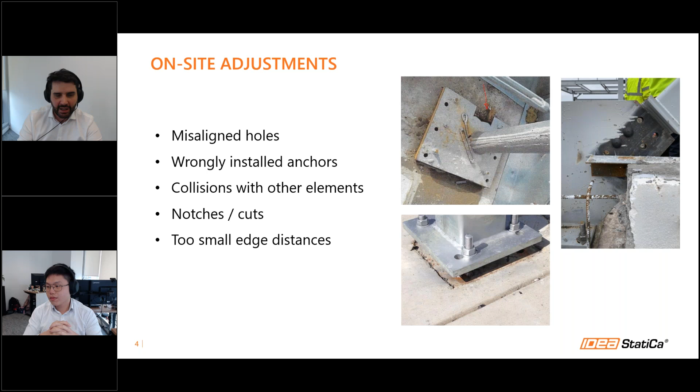And what are the issues if we need to resolve this? From my experience, typically if someone writes me an email like, hey, we need your help to resolve this situation, or they give me a call, I'm in the middle of something different. I've already finished the project, and now I have a new deadline. Now, out of nothing, I need to deal with a new issue. So I'm under time pressure. Also, I typically cannot use my software. If I used my Excel spreadsheet, probably I cannot do those adjustments to check the new situation.

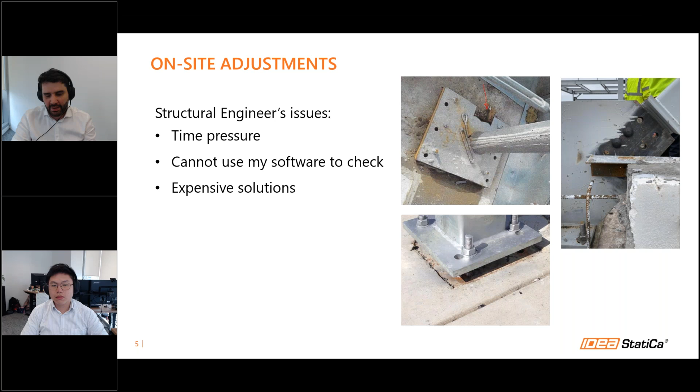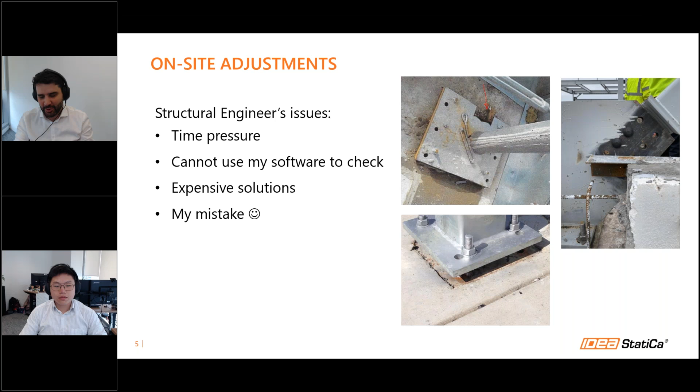Also, there are some solutions that can be quite expensive. I could propose, okay, I don't care, you need to fabricate a new piece, but it can be really expensive. It can cause big delays on site, and we are partners with site, so we want to find the best solution for them as well. And also what can happen, and it also happened, sometimes it could be my mistake. I have something wrongly specified or submitted a wrong drawing. So I need to find the best solution because then I can save myself.

Before proceeding to showing you those examples and how they can be easily resolved, I would like to ask you in our poll, how often do you need to deal with on-site changes? Let me please run the poll, and please answer if this situation is happening to you very often, just sometimes, or rarely. I just see some results. I would ask the remaining attendees to vote. About 50% have voted. Okay. I will give you 5 more seconds. Okay, let me close the poll and let's see the results.

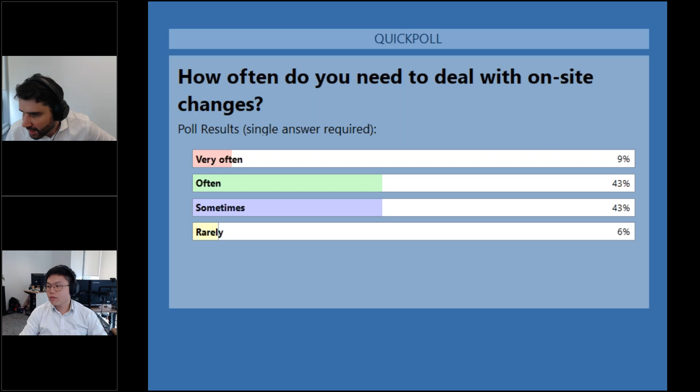I would say the vast majority is facing this situation often or sometimes. So it seems that it's good to have a tool to resolve them quickly and efficiently. Thank you very much for this. I will hide the results, and now I will pass the presentation to Stefano, and he will show you how you can deal with this situation easily. So Steph, it's yours now.

Okay, thank you, Jan. Let me try sharing my screen. Right. Okay, give me 1 second.

Okay, thank you. I prepared some case studies today for us to look into and see if IDEA StatiCa can really help you in those cases that you find during your work.

Okay, so the first case that I prepared today is this type of a connection to baseplate with some diagonal members. So let's say you have designed this nicely, you have submitted it, and now the plate is already manufactured. Everything is ready to be installed on site. But then you might see that on site there are some unplanned interferences preventing your bolt installation. For example, something like this is a real photo from a project. You will see that there are only 5 bolts that can be installed in your connection.

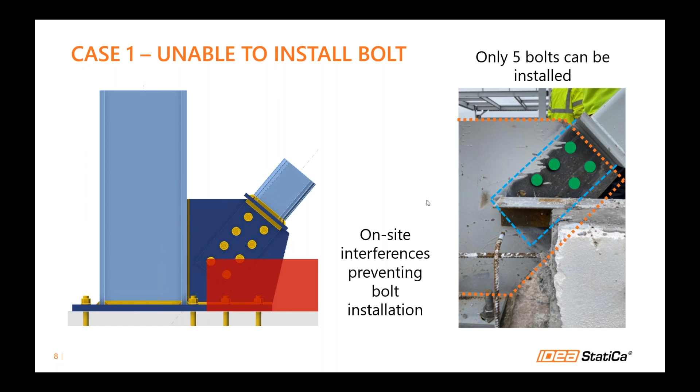Now, what can you do? You can change your design, maybe go to your Excel, but how do you consider the bolt openings that are already manufactured inside your plate? Then how do you consider the non-symmetry of the bolt arrangement that you see here? It might be a headache for you, but if you're using our software, you don't need to worry about it. I'm just going to open up IDEA StatiCa.

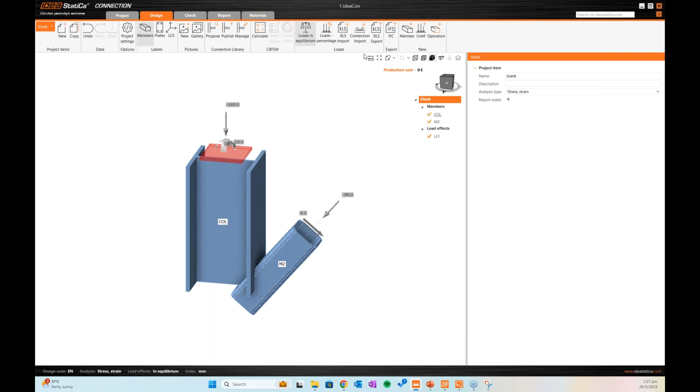Okay, so for this case, for example, this design has been done quite a few years ago, then you don't have the original connection file, or maybe you were using Excel or something before that. No worries, I'll just start from a blank. So firstly, you must model in your geometry with the right cross sections. Then you put in your forces. After that, you put in your original geometry first by using this operation tab here, top.

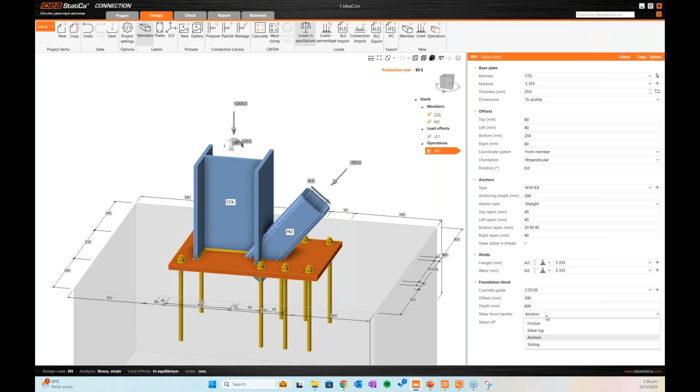Then firstly, I'm going to model in the base plate. Then I'm going to adjust the geometry to profile, and then you change the anchoring length based on what you have designed previously, and also the position of the actual anchors itself. And 40. Then change the offset, change this one to friction. Okay, now I've taken care of my base plate.

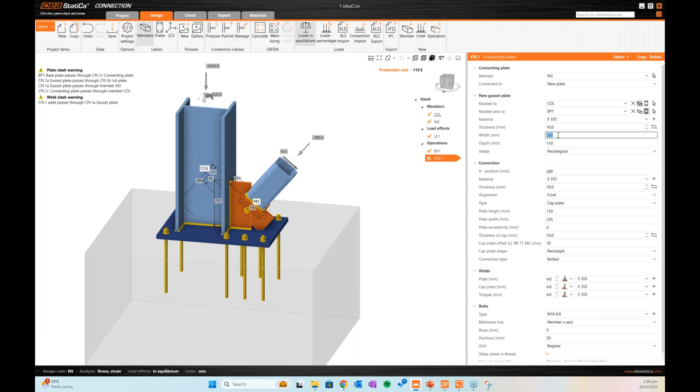Now I want to model in the connection of my diagonal members using this so-called connecting plate. So first you change the member that you want to connect. Then you want to relate it also to the base plate, because this connecting plate is related to both this member and the base plate, column and the base plate. Then you also need to change the geometry based on what you have manufactured. Change the capping plate, the geometry of the capping plate and the thickness of it. Same with the bolt, you can change it as per what you have constructed on site.

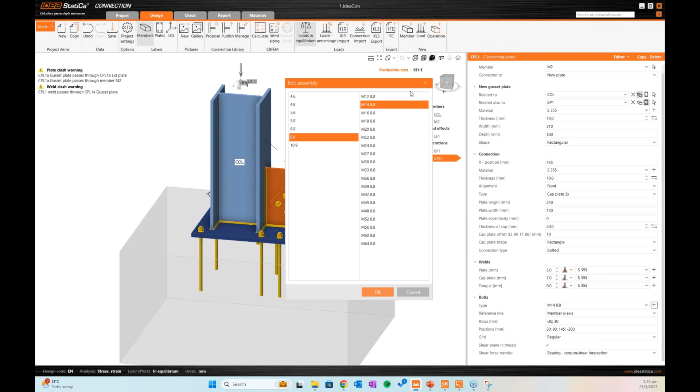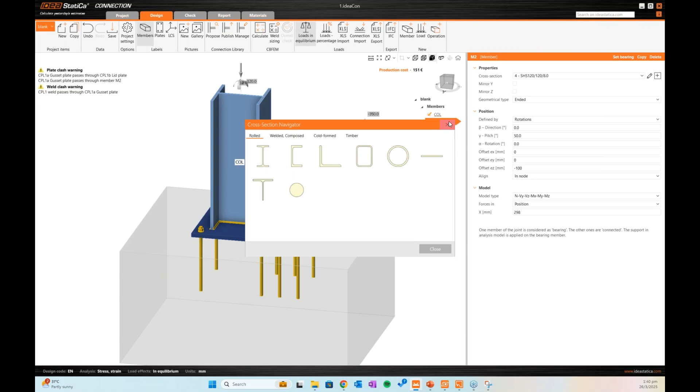Say, then yeah, for this one, yep. Okay, so basically you can just model in what you already have on site. You can also change the bolt material, bolt geometry, bolt diameter based on what you have on site. You can also create your own import, change your own section based on what you have on site. You can even modify or customize your shape based on what you have on site. So it's very flexible. And even in the material tab, if you are not using the standard materials, you can also customize this very freely.

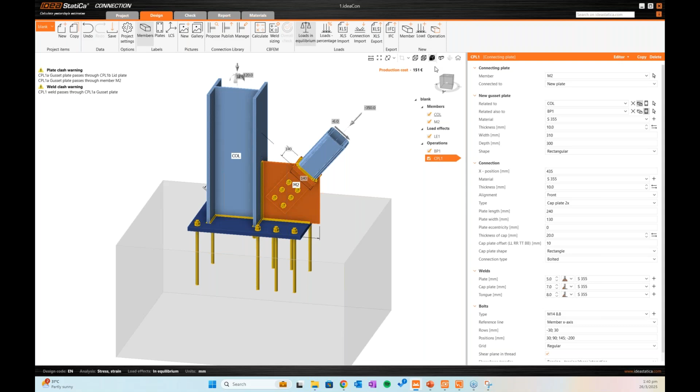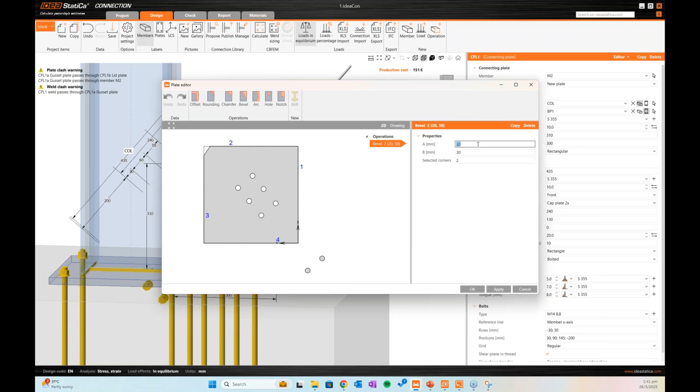Okay, so I have finished, but as you can see here, there are some warnings here. No worries, we can just go to transparent view, and then we can find where the problem is. So you can see here that my plate is going through my diagonal profile here. So what I'm going to do is put some cuts here by going to editor, going to gusset. I want to add some bevels. Change the sizes, adjust the corner accordingly. And then I add another bevel. You just need to click apply.

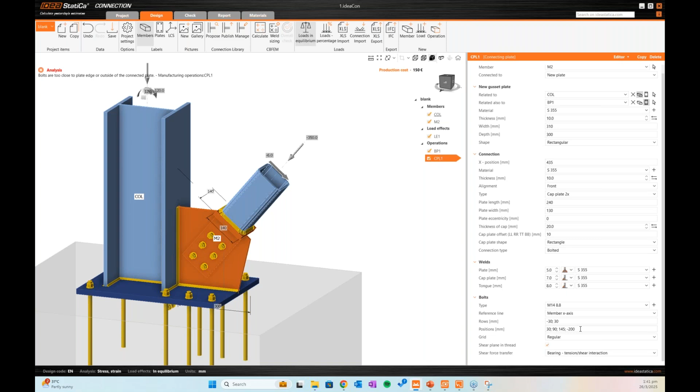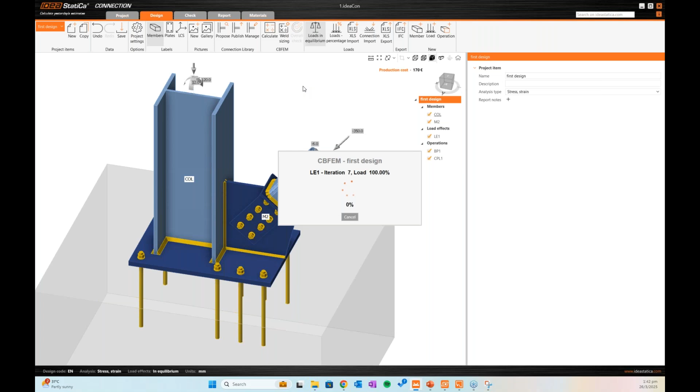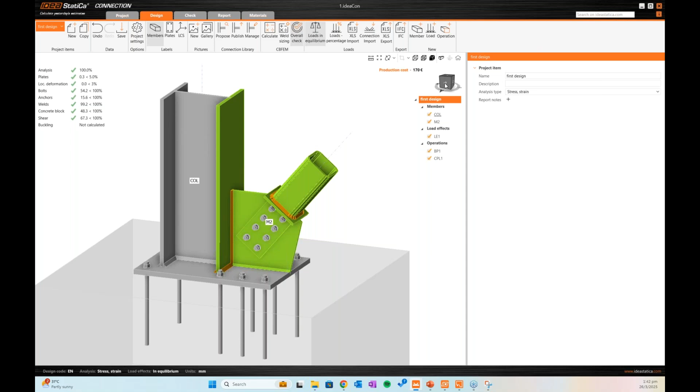Okay, now good. So you can confirm that your original or first design is working correctly. Now you want to adjust it to what you actually have on site. As I mentioned just now, we can only construct these 5 bolts. We cannot install these 3 bolts. So what you need to do is remove those bolts by going to this plate editor here. We go to editor, we go to tongue, and then we just explode the bolts. Then we want to remove 1, 5, and 6. That's it. Now you click OK.

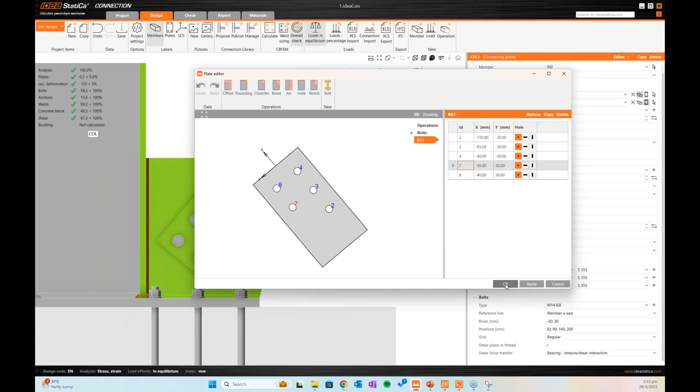You can see the bolts are now gone for the ones that you cannot install, but then you still need to put in the holes to mimic the actual geometry on site. So you go to editor again, go to tongue, then you just need to add holes for those bolts that you have just removed. Right. Then the diameter should be 2 millimeters plus your bolt diameter, which is 14. And you just need to copy it, then put it for the bolts that you have just removed. So that's it. Just click apply.

You can see there's a hole now in our tongue plate, but there's no hole yet in this connecting plate here. You just need to go to editor again, then click the gusset plate. Then we need to add the same holes here.

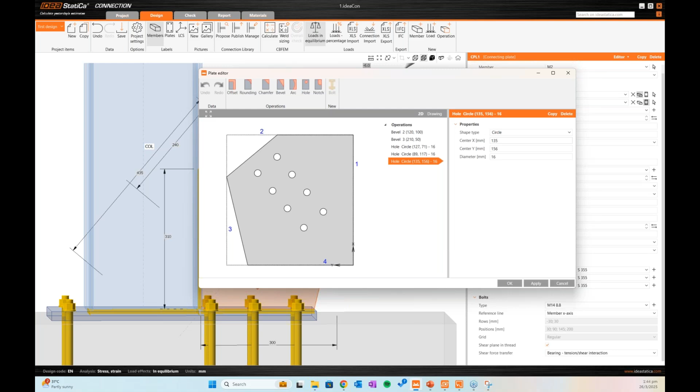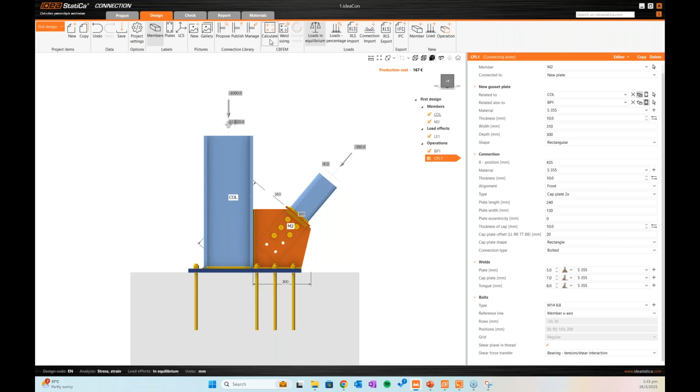Okay, once you are satisfied with the position, just click apply, and then you can check whether your model has the correct hole position or not. And you can see now that it already has the correct hole position, and that the geometry is now matching what we have on site. So now we don't need to worry whether it can work or not. We just need to click calculate and check whether your connection is really working with the given load or not.

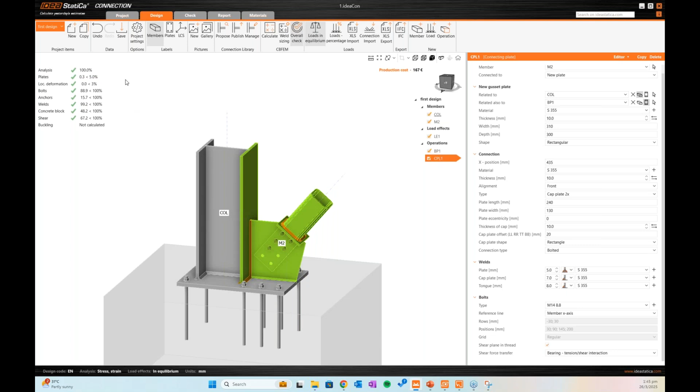Right, so you finish running, you can see here that we have all ticks here, meaning that our current on-site design is working. So yeah, you can remove just these 3 bolts and leave the hole there, and now your connection is still working as intended. If you want to see more detail, you can go to the check tab here.

You can see all the bolt forces, the anchor stresses, the weld stresses, then the concrete block stresses, all that. Yep, you can check all this very detailed report here, and of course you can also check the equivalent stresses of your plate. Once you are satisfied with everything, you can go to report.

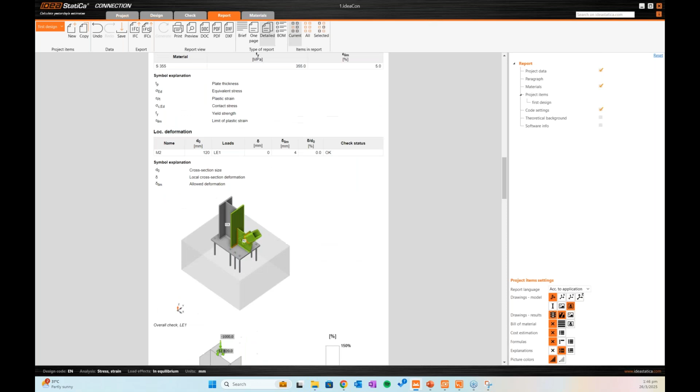Then you just need to click generate report. And that's it. You can use this to justify whether your on-site connection can work or not. Then you can submit this and then go on with your day. So that's the first example. Now let's see the second case study.

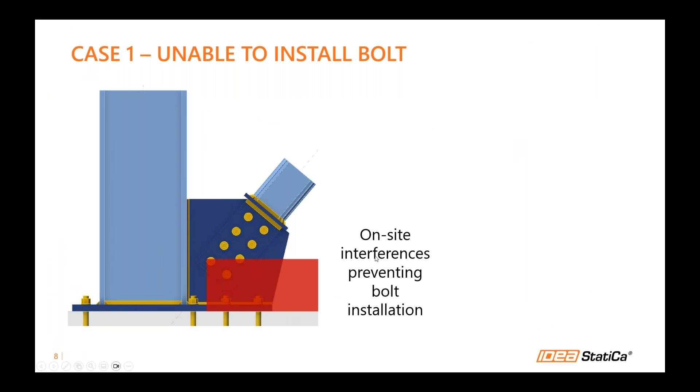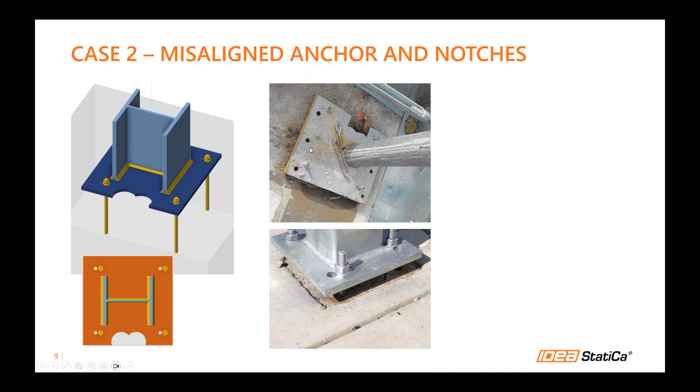Right. So the second one, let's say you have designed your base plate, put in your bolt, checked your bolt and everything, but then when it comes to site, when they're trying to install it, the anchor is actually misaligned. So you have manufactured your plate, you have installed the anchor to your concrete, then you have cast your concrete, and then when it comes to installing the plate, it's actually misaligned with your bolt hole.

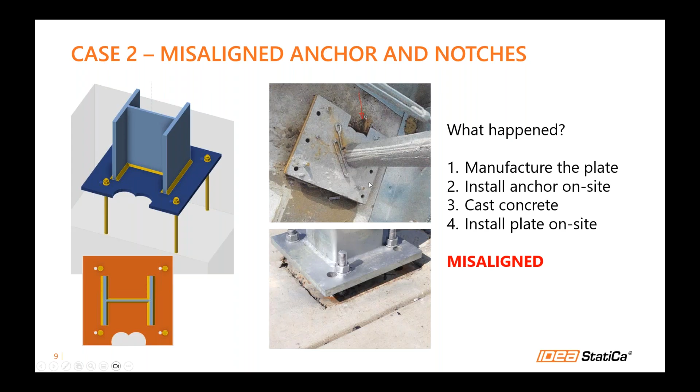Then there are also some cases where maybe we have some manufacturing defects here. As you can see here, there are some holes in the plate that were not planned. But same as before, you don't need to worry if you are using our software. You just need to open our software and model all these holes and all these openings as per what you have on site, and check whether the connection still can work or not. So I'm going to do that now. Going to the second case.

Okay, for this one, let's say you are using IDEA StatiCa, you still have the original connection model. So what you need to do now, you just need to modify this model. Okay, the first thing that I'm going to do is I'm going to move the bolt and then add the misaligned holes. What you do, you can go to editor, and you can move the bolt to the current location.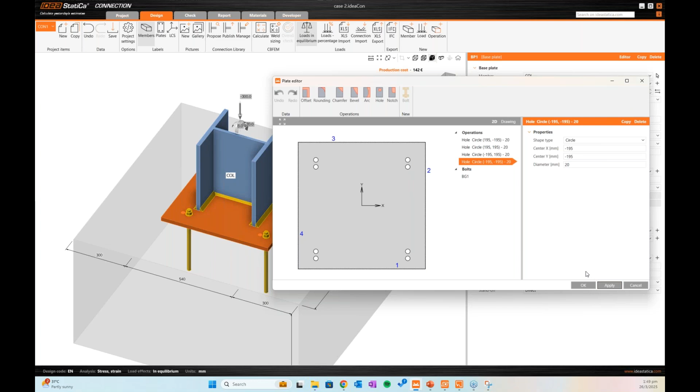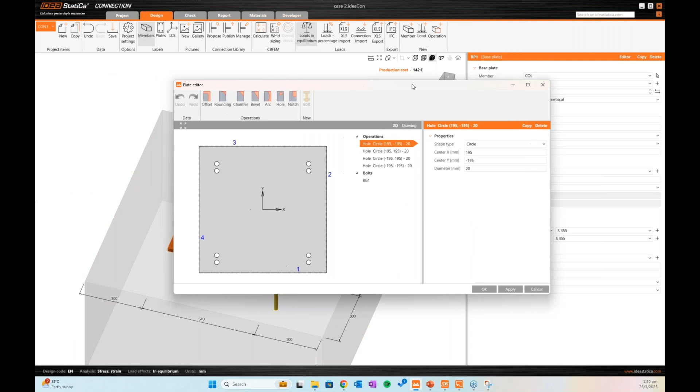Okay, so as you can see here, we have successfully modeled the misaligned base plate, and we can also model the hole very easily. Then one thing left, I want to model the manufacturing defect holes that we can see here. For that, you can use the same thing by going to editor here, and I just put another circle hole with adjusted position and adjusted diameter. That's it. So click apply. Now you can see that even the manufacturing defect you can easily model inside IDEA StatiCa.

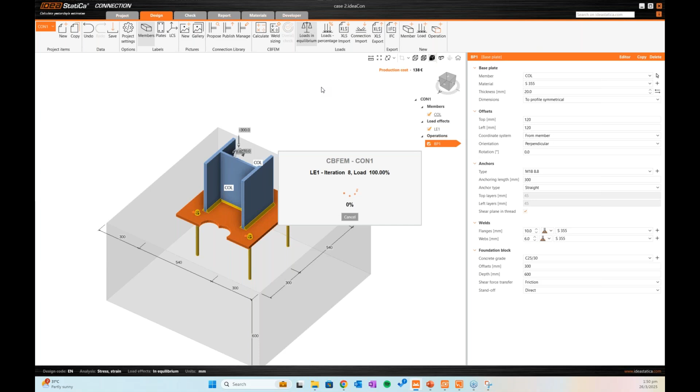After that, you just need to calculate and confirm that your current connection is still working. You go to the check tab here. You can check the stresses of your plates. Yeah. And you can see the stresses inside the concrete, how the manufacturing defects and how the misaligned bolt affect your concrete stresses and all that. You can also show the deformed shape if you would like to, so that you can confirm that everything is still okay.

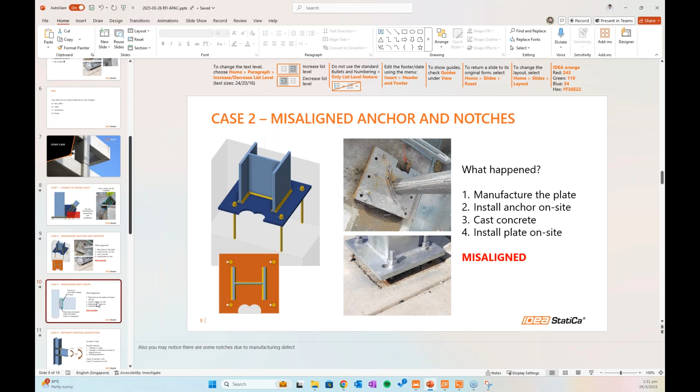Right, so that's my second case study. Now let's jump on to our case number 3. So for this one, you have already designed your connection, same as previously.

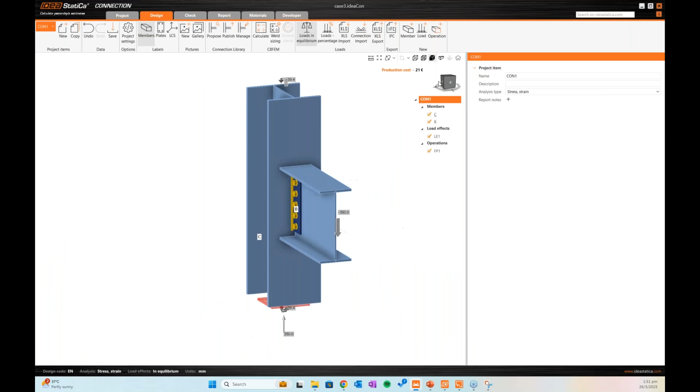Right, so I'm going to go to the software IDEA StatiCa here. So for this case, I have a pre-prepared model. Let's say this is your original design intent. We just run it first and check everything is working. Right, so everything is working correctly for the original model. But then, what do we do if we have something like this? We have a misaligned hole like this.

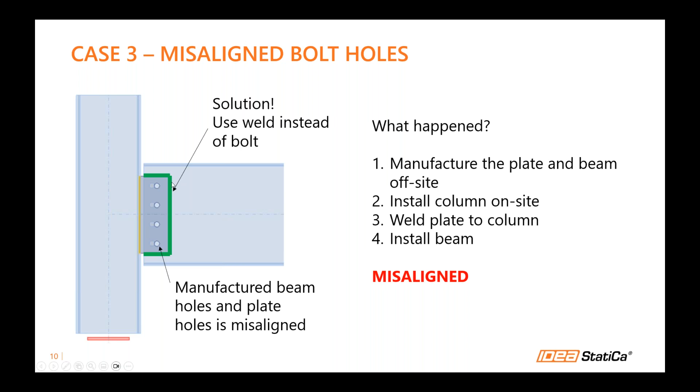The solution will be just to not use the bolt anymore, but we can just use a weld all around this fin plate instead. So to check the new solution, you can easily do it using IDEA StatiCa. Firstly, you want to remove the bolt first by going to editor and then explode and delete all the bolts here.

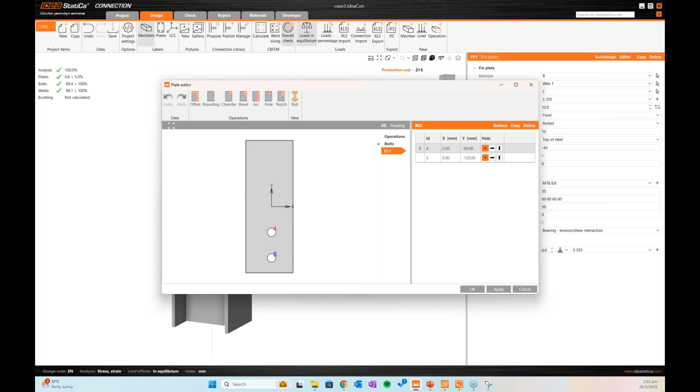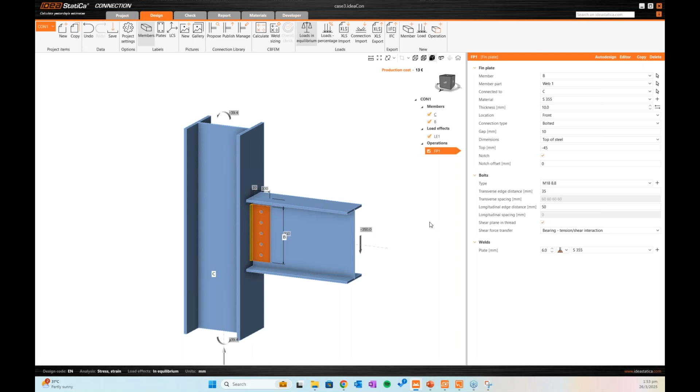Now we just need to put a hole to our beam web. Now to do that, you can use our opening operation. You just put it in and then you select the web, the beam. And then you change the diameter according to our bolt size. And of course, you need to change the position accordingly. Right. X position is not correct.

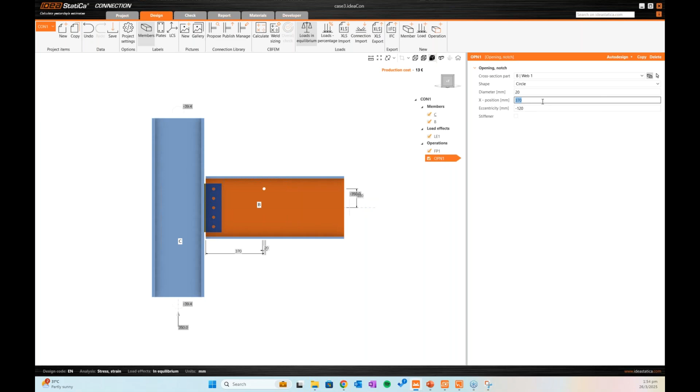Right. So as you can see, you can use this opening operation to actually simulate the bolt opening that you have manufactured to the web of the beam. Then I just need to copy this and change the eccentricity here, which is the location. Right. Oops, what is this? The intersection. Oh, okay. Minus 120, minus 60, 0. Let me check. This one is causing a problem.

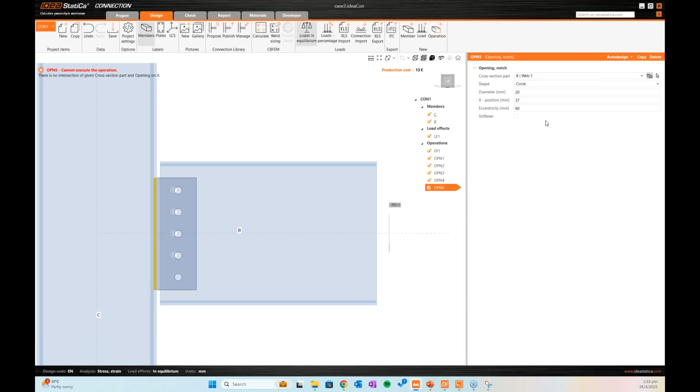Copy. Minus 60. Okay, sorry. So we have minus 60 on top. So now it's 60 and 120 on the bottom. Right. So once you are satisfied with the bolt hole and you think it already matches what you have on site, now it's just left to put the weld around the fin plate and connect the fin plate with the beam web.

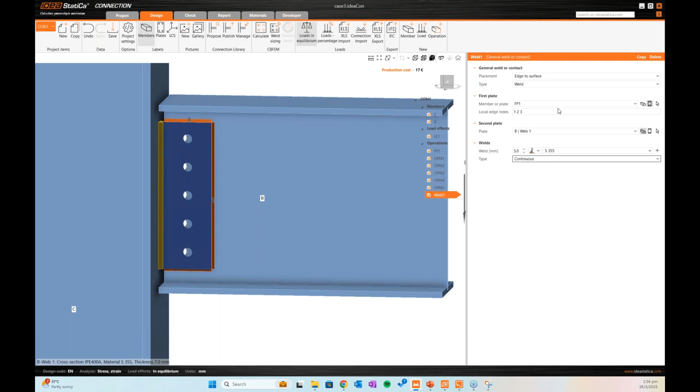We're going to go to operation and add a weld operation here. Then we need to change the second plate to beam web. Right. Then you can see here some small numbers, 1, 2, 3. 1, 2, 3 are actually the edges that you want to weld between these two plates. So I'm going to make this a C-shaped weld here, so I'm going to use index 1, 2, and 3. Then I just need to change the weld thickness as per what is required.

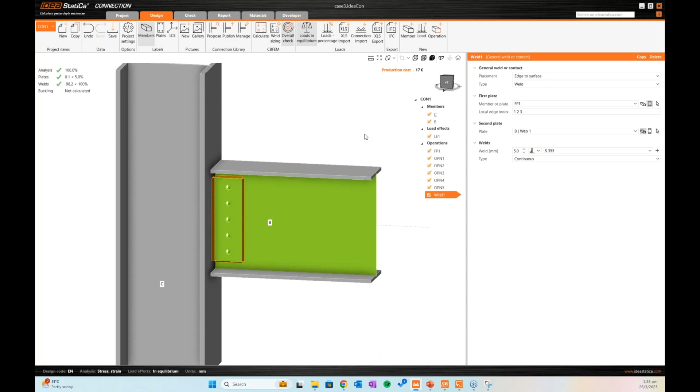So that's it. We just need to click calculate. And you can see in just about 2 minutes, I can actually confirm whether my design can work or not. So you can see it's very easy to play around with your design, iterate all solutions that you have in mind and see which one works best for your connection. So we have solved our case number 3. Now let's move on to case number 4.

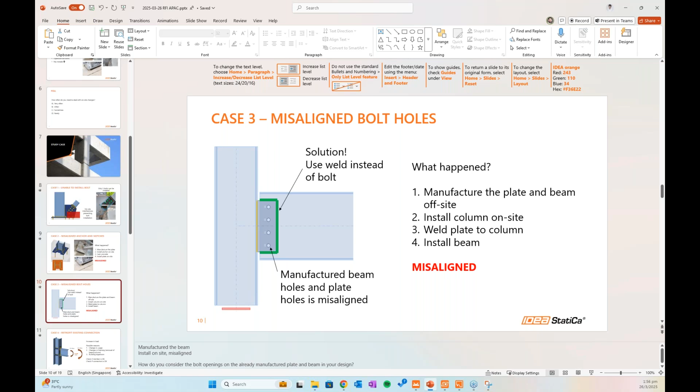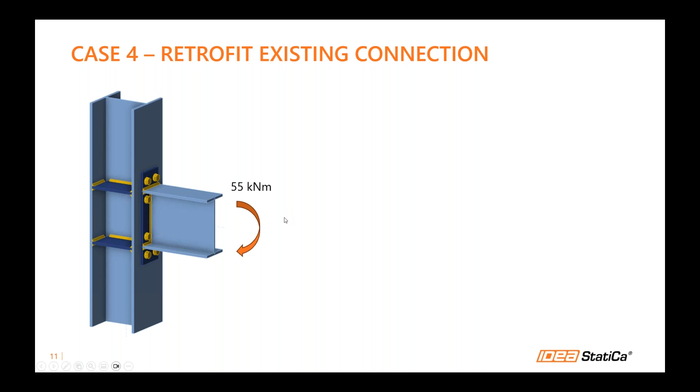Okay, so for this case, let's say there's a building that was designed in the past, maybe 10 years ago or so. Then the owner of the building wants to change the usage of the building. By changing the usage of the building, there'll be an increase in forces to our connection design here. So there are multiple reasons that the increase in load might happen.

As I mentioned, maybe change in usage, change in framing, maybe removal of some columns and beams, which of course will increase the load to your connection here, and maybe some building expansion. So what do you need to do after this? You need to modify your global FEM, and then check whether your member is still okay in your global FEM. Once you confirm that your member is okay, you need to confirm whether your existing connection can work with this increase in load.

Right. So I'm going to open my IDEA StatiCa here. For this one, because most probably someone else did the design a long time ago, you would not have the connection model. So I'm just going to start from a blank model. I'm going to show you the templates that we have inside our software here by clicking this propose button.

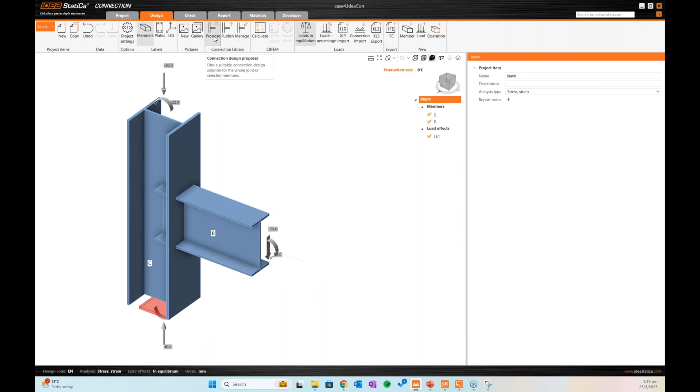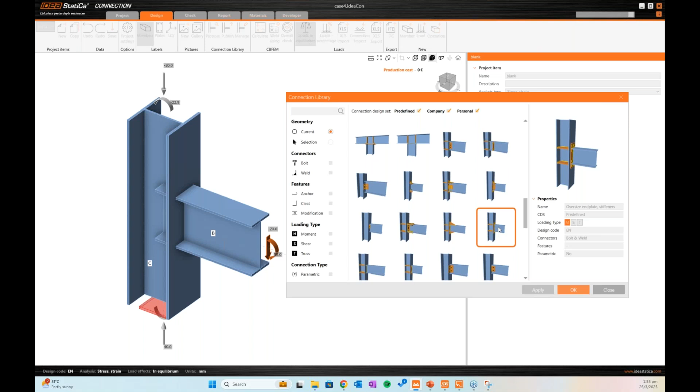Right, so what does our template do? Actually, it will detect the geometry of your connection, and then it will suggest all the connections that are appropriate for the geometry that you have modeled. Right, so I'm just going to see whether our on-site connection has something similar here that I can use. Okay, maybe this oversized end plate is good enough and can match what we have on-site. So you just click OK here.

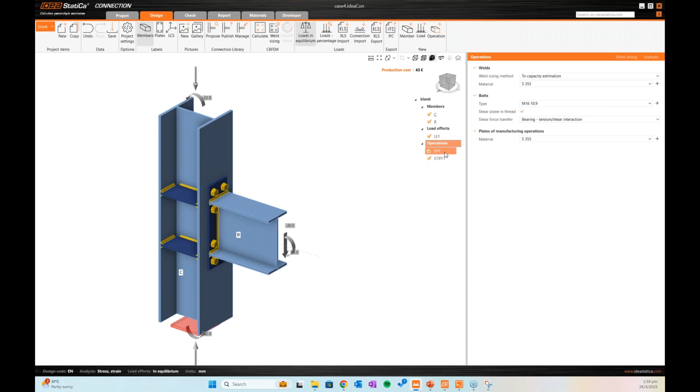You can change the steel grade and bolt grade accordingly, but I'm not going to do that. Just going to click OK, and you can see with those 2 clicks, you can actually model the whole connection easily using our templates. But then I still need to adjust a little bit according to what I have on site. Right, just change the bolt grade, and I change the size of the weld.

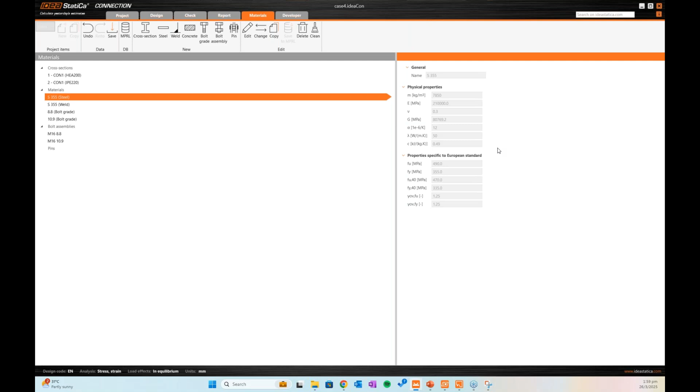As I mentioned, because it was designed maybe a long time ago, maybe you don't have your bolt grade here, you can actually customize it very easily here. Same goes for your steel members. Maybe you are using some material which is not used anymore. You can just go here and customize your material freely.

Right, once you finish, then we have our original load here before the changes in, let's say, building usage. So this is our original load. I'm just going to run it and see whether everything is working correctly or not. So as you can see, you have confirmed that the current design can work for the current load. Now we want to check whether with the new load, our connection still can work or not.

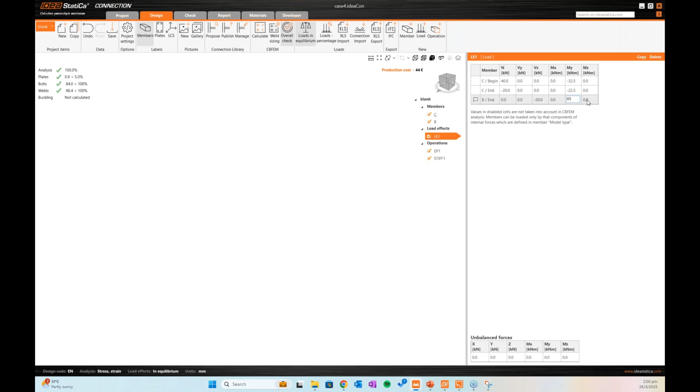So I'm going to increase the bending moment from 55 to 65 and add some more shear, minus 20 to minus 30. Then I need to change all these so-called reaction loads so that I can get the balanced force in my node. This one, 60 and here minus 30. As you can see now, my node is balanced. You can confirm it by looking at this unbalanced force table, and everything now is 0.

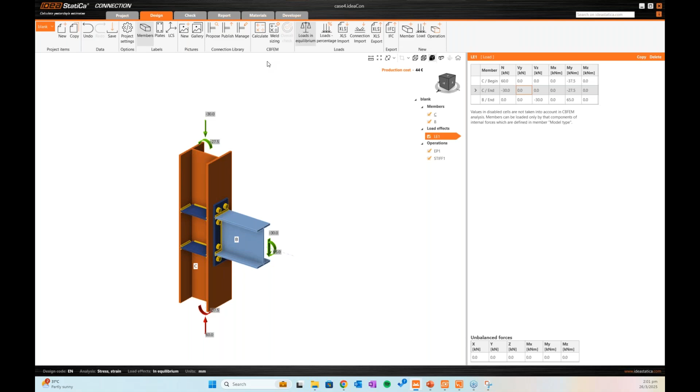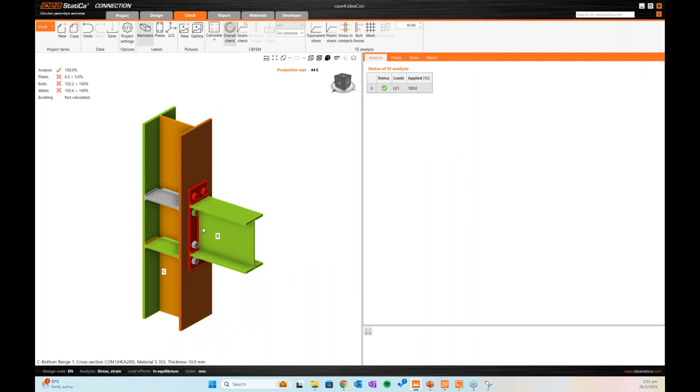Right, I'm not going to change my design now. I'm just going to check whether what I have on site now can work with the increase in load or not. Okay, now you can see that actually this plate is not working. You can go to the check tab, and so this plate and these bolts are not working. Go to the check tab. So what I like to do, I like to turn on this plastic strain and see the deformed shape.

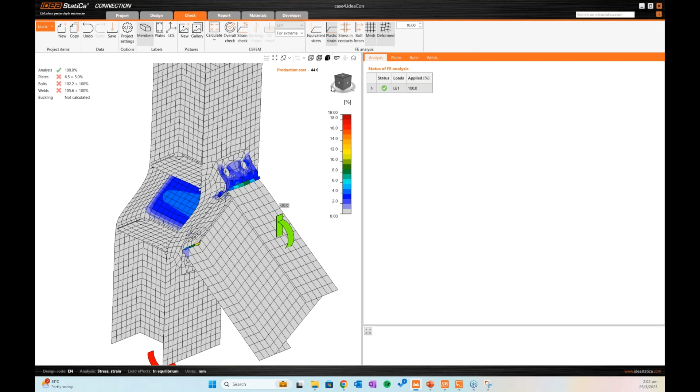You can see that this plate is working hard, but this panel zone is also working hard, if you see here. So we're going to think what we need to do here. I'm seeing some panel zone working hard here. So maybe for the first iteration, I just strengthen the panel zone here.

So what I'm going to do, I'm going to use operation, use this stiffening plate, and I'm going to change the position to member, change it to C, and web 1, change the type to doubler, and the location to both. So both indicates that it's in front and back. I'm going to change the thickness and the geometry of my doubler plate. Right, so I'm thinking, okay, maybe this one can work to strengthen our panel zone. Just click calculate again.

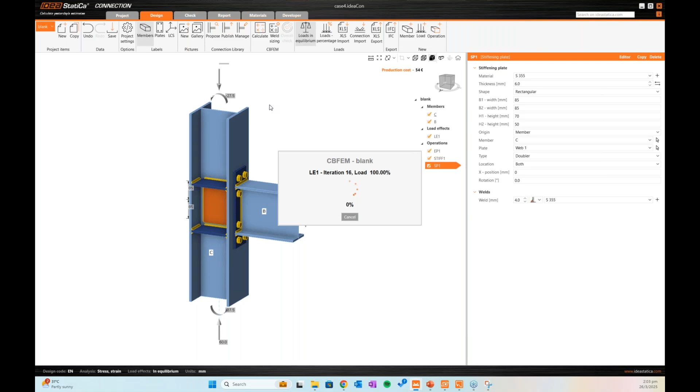Oops, okay, so the panel zone now works, and this plate also works, but then there's still a failure in this beam. Okay, then what do I need to do next? I'm thinking to add some kind of seated connection, a seated plate here, to actually strengthen this connection. I'm going to use operation again. Now I'm just going to put a rib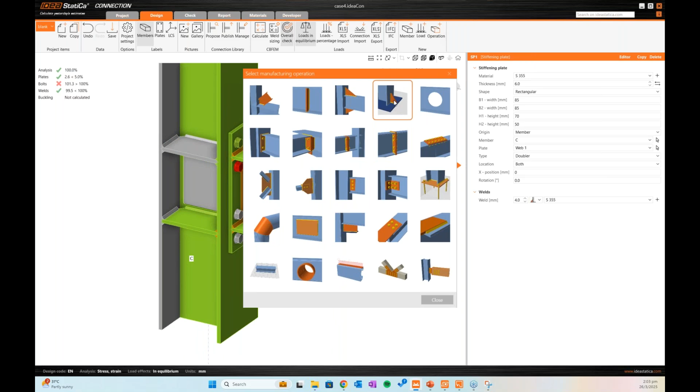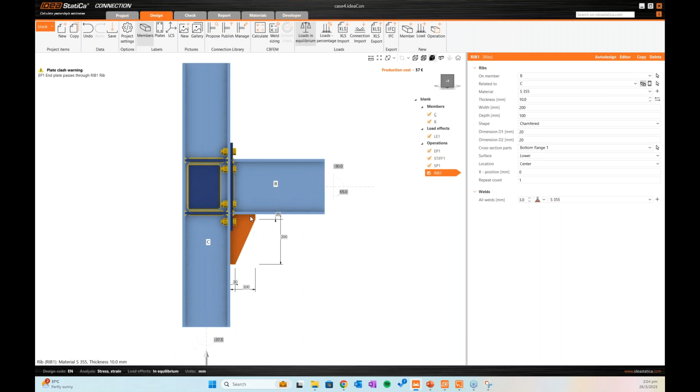connection and change the thickness, geometry, change the shape to chamfered, and change the position to bottom flange. Surface lower, the position is center. So I want to add some seated connection like that. Seated plate. But then you can see here that there's some plate clash warning.

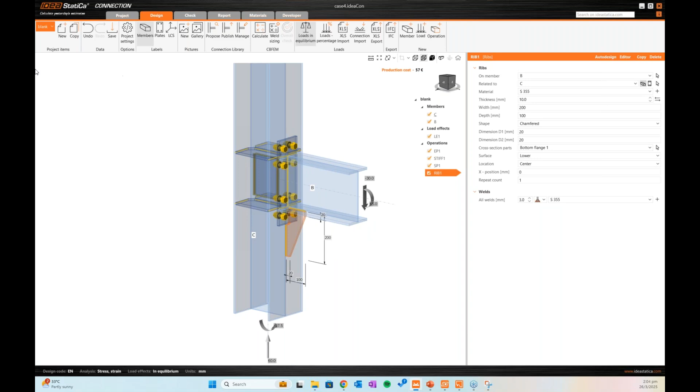Same as before, when you see a clash warning, you just need to go to a transparent view. You see a red color. Red color indicates where your clashes are. Right, so I need to add some kind of plate cut here. You can do that by going to editor, and I will add some notches. Selected corner number 5 and change the geometry. Apply. And you can see now that the plate clash warning is gone. And let's just quickly calculate.

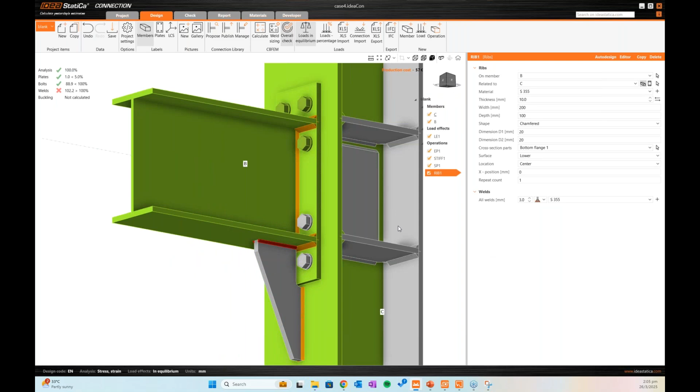Right, as you can see here, there's still a bit of failure here. I'm going to click this one, change the value to, let's say, 5, make it a little bit bigger. Let's click calculate again. Right, now as you can see here, there are 4 ticks, which means your connection is working. So it's now all good.

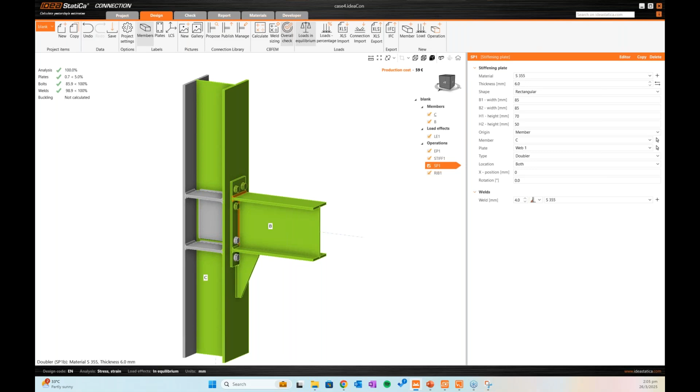But then I see the panel zone seems like it's not working, because you see the traffic light here. The traffic light colors here indicate that gray is not so much used, or underutilized, whereas green is optimal. So I'm thinking maybe this panel zone is not really needed once you added this seated plate here. So I'm just going to turn this operation off and remove the double plate on the panel zone of the column. Then I just click calculate again.

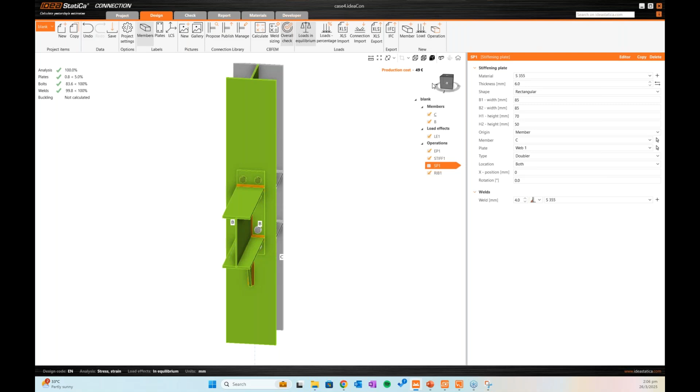Right, now you can see that it can even work well without the double plate. So yeah, I'm satisfied with my final design. I was able to try out several different solutions quite easily here, iterate through them, let's say double plate and then the seated plate. Then I can find the most optimum solution for my connection here. So once I'm satisfied, same as before, I can go to report, generate report. And then you can use this to submit and justify your strengthening of your current connection design. That's it for my case number 4.

Now the last case that I have here is, for example, you have already satisfied your base plate design here. This is a base plate connected to some sort of slab. But then when it comes to construction, you might see that your concrete slab is not cast in the correct location, which means the edge distance of your anchors has now become much smaller. Then you use IDEA StatiCa to check whether the edge distance is okay, but you see that there's an anchorage failure due to the smaller edge distance.

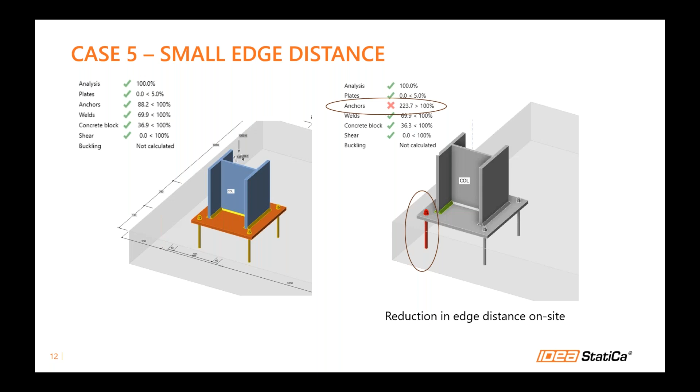So what do you do here? You don't need to worry, because we have our concrete module whereby you can actually model in the slab reinforcement which you have cast. We have this link between our connection application and our concrete application, so all your forces from the base plate will be transferred automatically, and all the geometry of the base plate will be transferred automatically as well. You just need to model in your reinforcement, click run, and see whether your anchor still fails or not.

But we found out here that, considering the rebar inside the slab, the anchorage actually is fine, and it can work as per what it is designed for. So you don't need to worry, you just need to then submit this justification, and you can go on with other design.

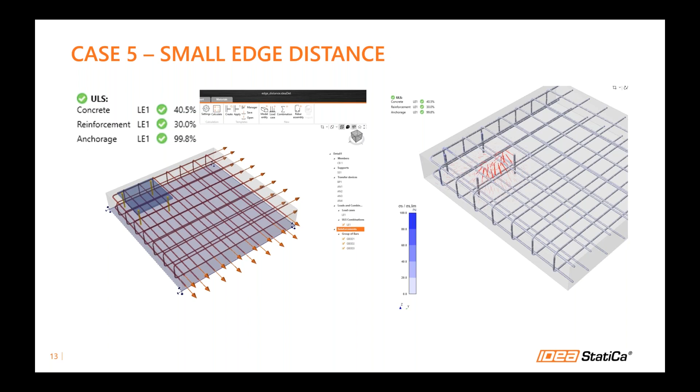So thank you for showing all these examples. In a small summary, we haven't shown the last example much in detail because this is something pretty new, and we currently support only Eurocode, but in a version coming in less than 1 month, ACI will also be included, and we will very likely do a separate webinar for this. So stay tuned. But overall, how can IDEA StatiCa help you right now?

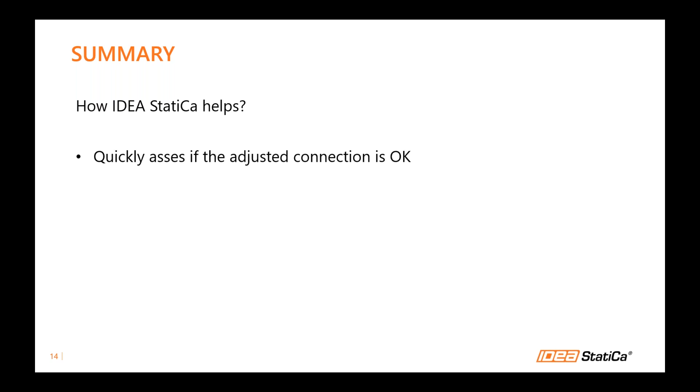You can quickly assess if the adjusted connection is okay. So if you are asked to do that, you may use some excuses, but you may say, okay, I will do my best, and see if all the crazy things which may happen on site can be verified. You can model the connection components as they've been manufactured. You can take into account all the effects of holes and notches. Sometimes we structural engineers may say it won't have any effect if we don't include the hole there. But the client may ask, I want to prove it. I can see the hole on site, and I can prove by calculation that it won't have an effect. Okay, then you can prove it.

You can also iterate all the possible solutions of retrofitting easily. So you may check whether you should weld it from top or from bottom, what would be the most convenient way, because sometimes the first proposed option may not be the best. So you can spend a little more time on finding the best solution.

And ultimately, you can submit a report and prove to anyone that this site change is okay. It follows the code. It's very important. You have proof that all these changes are still according to the building code. So I would say these are the main takeaways. What can be the benefit for you as structural engineers? You just prove it's okay, and you have a tool for that.

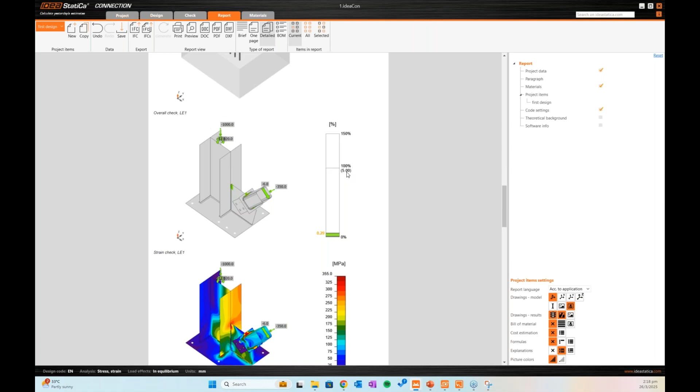So basically our plates and our members are designed to this 5% plastic strain limit here, which is based on Eurocode. But on other codes, this limit of 5% plastic strain also matches what the other codes are using. For example, AISC: if we test the limit on AISC, it will be matching what we have as a 5% plastic strain that we've taken for Eurocode.

So yeah, to answer your questions, we are using this 5% strain limit to actually check the plate and the member.

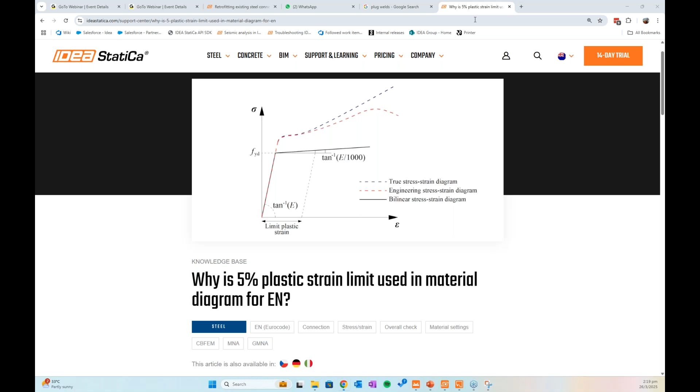Thanks, Steph. Maybe one more question. If you're on web, can you just go to the BIM page and show the links, because there are some more questions about whether the calculations from other structural analysis software can be used. Yes, it can, and I will show you where you can find more details. So you can go to our website here, ideastatica.com/BIM. You can see the list of the software that supports linking to our software, IDEA StatiCa.

You can select whether you want to connect your FEA software, such as SAP2000, Midas, and ETABS, or you can choose your CAD software instead. So how it works with CAD software: you model your connection, let's say in Tekla Structures first, then you can import it easily to IDEA StatiCa. Thanks for that.

Also, there's a question regarding whether chemical bolts can be used and if IDEA StatiCa can verify the adequacy of these bolts. My answer is yes. The ideal tool for this is IDEA StatiCa Detail in 3D, something we showed you in case study number 5.

You can specify the bond strength of the chemical anchor there. So if you are using, let's say, Hilti products, Fischer products, other products, they will give you this value. You can use it there and check it in Detail 3D. We can show you more when we have it localized more for this market. Now it's only Eurocode, but still you can find more information on the web.